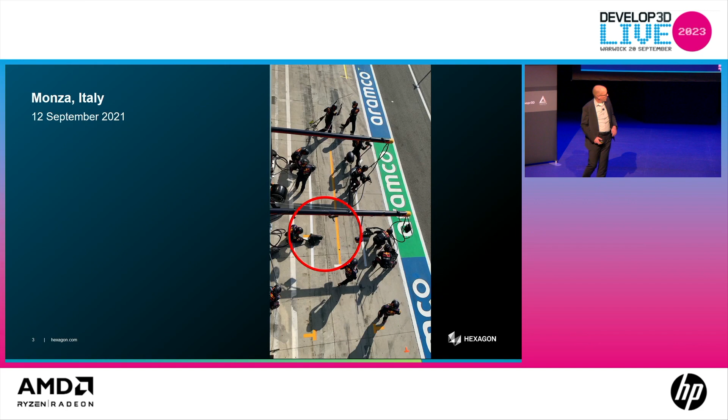So as I run this again, keep an eye on the guy on the front right wheel as the car comes in. This is at the peak of the rivalry between Max Verstappen and Lewis Hamilton, the star driver for Mercedes. Max is leading the race, which is going to put him in the lead for the championship for the year. So this is a team under a lot of pressure, and they mess it up.

So it turns out that the Red Bull pit stop is a terrible metaphor for team working.

These guys are not working as a team at all, at least not in any sense that's of any use to us. What they're doing instead is they're following a carefully designed process, one that's been meticulously refined over many years. They've rehearsed it over and over again to almost perfection. And with that process, they're able to achieve the world record—changing 4 wheels in less than 2 seconds.

But as you've seen in the video, the problem with something that's process-driven like this is that when something goes wrong, the whole thing falls apart. It took them 11 seconds instead of 2 seconds—5 times as long as it should have done to change that wheel, because as soon as something went wrong, they didn't know what the hell to do next.

Now, just to complete the story, those of you who watched Formula One will probably remember what happened next. Verstappen goes out onto the track. About 60 seconds later, Hamilton comes into the pit stop for his pit stop. His goes much more successful. He comes back out onto the track. There's just enough time for Verstappen to have done a full lap of the circuit. As Hamilton's coming out, Verstappen's pulling up alongside him. The two of them end up next to each other down the main straight at Monza.

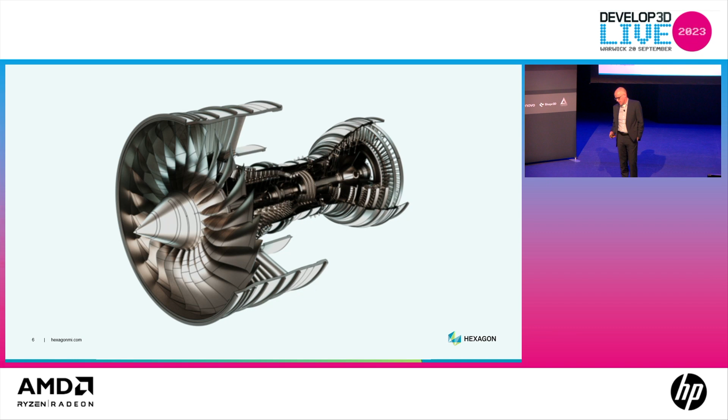Achieving that collaboration across the organization is a real challenge in this case. And that's anecdotal, but it corresponds exactly with the research that we did when we started developing Nexus.

This, by the way, speaks to the rise of the metrologist. So one of the areas that we operate in is, again, in metrology - offering equipment like this for doing quality inspections, measuring parts, and software like this.

What we've observed as a business over the years is the increasing importance of the metrologist. They used to be the quality inspectors at the end of the process that just said yes or no as to whether a product was going to go out the door.

Then we started talking about digital thread and Industry 4.0 and all that stuff, and the data that the metrologist was generating suddenly became really important. This is where you make the bridge between the digital thread and what's actually going on in the world. And then you get to a story like the aircraft engine manufacturer, and now the metrologist is really in the forefront of innovation.

So they need to be working really closely with the designers to ensure that as we're pushing the boundaries on these product designs, we're ensuring that they continue to be manufacturable.

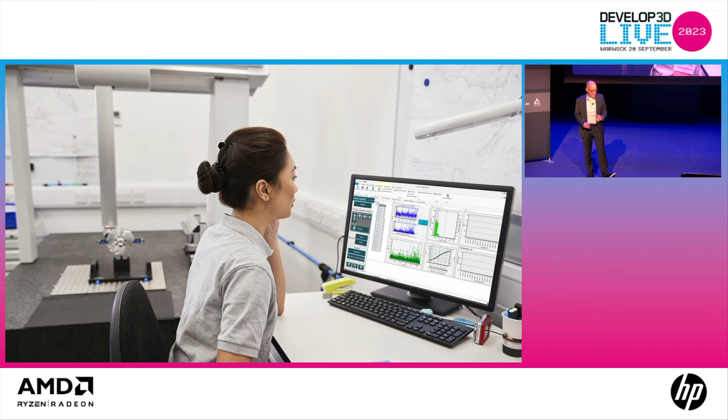It's anecdotes like this and research like this that led us to develop Nexus. Nexus is deliberately intended to be a cloud-based, data-centric platform that's different to all of the others. Up here in the top right-hand corner of my diagram, I've grouped together all of what I've called the classic enterprise systems, including all of the PLM systems.

We've heard from Aras today, we've heard from Siemens talk a little bit about Teamcenter in their presentation and so on. Not only the PLM systems, you might put your manufacturing execution systems up here, your MES systems. You might put your PDM systems up here.

We've got a few as well. We have a simulation data management SPDM system called SimManager that would sit up here. We have a QMS system, a quality management system called ETQ Reliance that would also sit up here. And they're all what I would call systems of record.

So they all exist. One of the core functions they all have in common is that they provide centralized, disciplined data management. So an engineer doing a task, whatever it might be, checks data out of the enterprise system, does their work in it, solves a problem, checks the data back in again. The enterprise system is maintaining a history of everything that's happened, of who changed what. A really essential function. I'm not trying to suggest there's anything wrong with that.

We're not trying to challenge that at all, but this is the embodiment of the centralized manufacturing organization today. This is about centralized control of an organization, and it's all about the process, about everything that makes things work. It's about the reason why Red Bull are able to change 4 wheels in 2 seconds, but it's also everything that's wrong with that as well. It's about the kind of constraint and the centralized command and control.

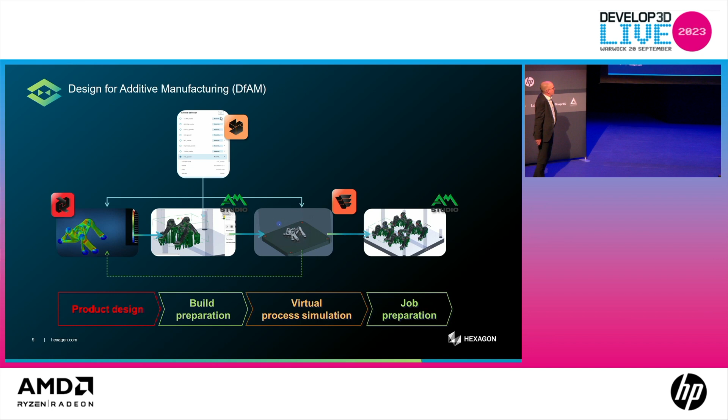What you'll see in this video are a handful of different products. It so happens they're all Hexagon products. Nexus is an open platform. We're not only interested in integrating Hexagon products. Sadly, we don't have any customers that only buy products from Hexagon, so the platform has to be open, and we're passionate about it being open.

What we've done in this Nexus solution is connected together a handful of different products that engineers working through the design phase for additive manufacturing might use to work together. The first one you just saw was a product called Apex Generative Design. It automatically generates the geometry for this part, the optimum geometry for supporting the loads. As it happens, this part is an engine bracket for a Formula One engine. That's just a coincidence, but that's what it is.

So the first product was the product design. The second one you just saw was the build prep, a product called AM Studio.

It does the build prep, so it puts in all the support structures. If you're 3D printing in metal using a powder bed fusion process, you need to put support structures in place because while the part is being built, it'll collapse unless the support structures are in place.

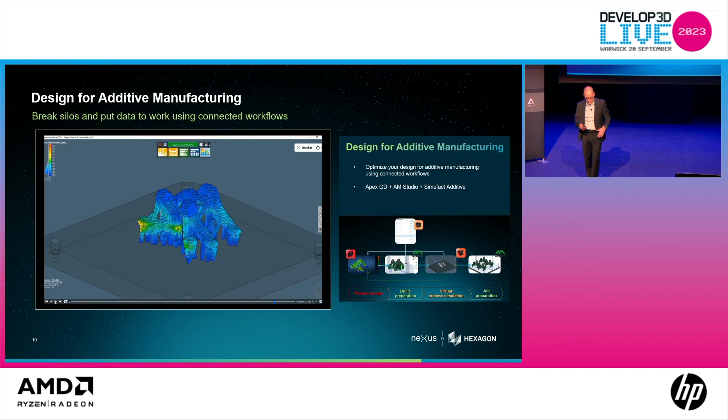Then the third product, Simufact Additive, simulates the manufacturing process. Again, if you're going to 3D print in metal, it's expensive. There's a lot of thermal stuff going on, a lot of stresses that appear in the part while you're printing it, and so there's a lot that needs simulating in advance. So you simulate it before you manufacture it.

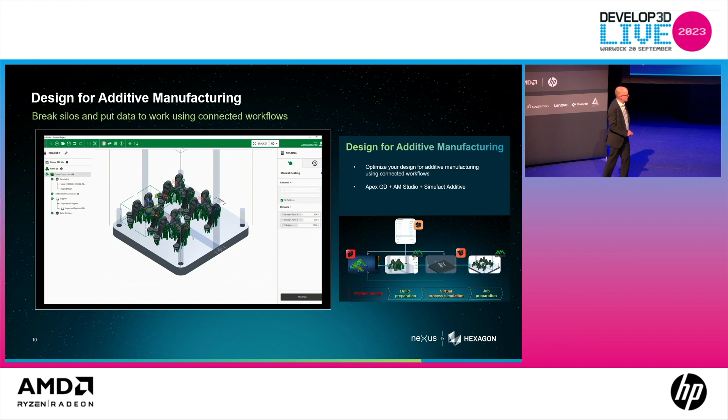And then finally you go back to AM Studio, which just does the job preparation, kind of slicing the part to generate the commands that are going to drive the 3D printer. There's also a materials database feeding data into this whole process.

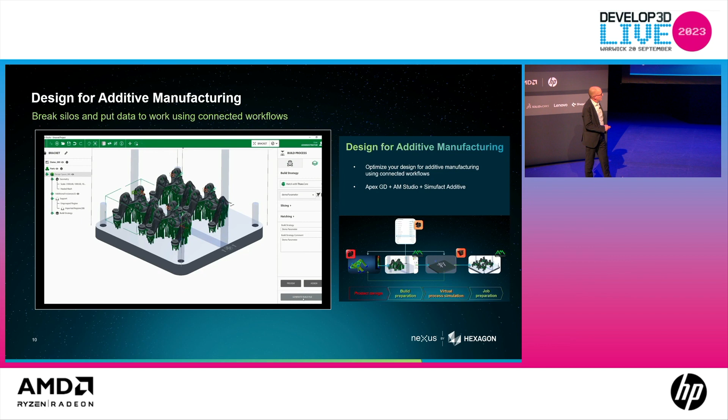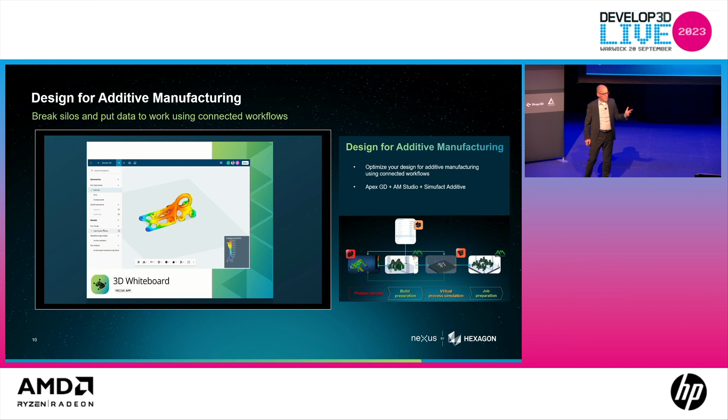So at the heart here there's three different products: the product design that the designer is using, the build prep used by a production engineer, and then a simulation product used by a CAE engineer or a manufacturing simulation engineer or whatever it might be. Three different products. Some of these products have existed for decades, by the way.

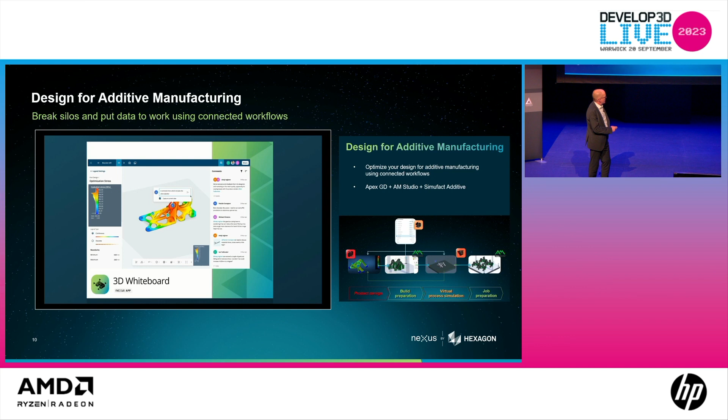Some of them are brand new. This materials thing is brand new, some of them have existed for decades. The engineers using these are very familiar with them. There'll be a lot of resistance to move away from the existing products they're using. This thing's up in the cloud, some of these are desktop-based products. A mix of technologies, a mix of engineers, a mix of disciplines.

Now, what Nexus does is it connects all of these products together in real time, and so data is streaming in real time from one product to the next. So it initially solves the easy problem, which is how do you get data from one application to the next. But it's doing more than that, because it's streaming the data in real time, any changes that one engineer makes can be immediately seen, immediately reflected in the applications that the other engineers are using.

And so this stimulates an environment where the three engineers, the three different disciplines, can work together to solve a problem. So let's say that the third engineer simulating the 3D print discovers that there's a problem, that for some reason this part isn't going to print correctly. The question has to be asked: is that a problem with the design, or is it a problem with the production engineering, the build prep of the part?

With these three applications connected together and streaming data in real time, these three engineers can work together in real time to solve that problem. They get on a Teams call together. The designer can tweak the design, you can tweak the build prep, and the simulation can be running simultaneously.

And so hopefully by working together in that way, they can find a solution to that problem much more quickly than the traditional method, which would be that the simulation engineer writes a report, sends it to the first guy, and they kind of go around the loop again. You keep iterating until the problem is solved.

And so it's just an example, in a very specific space in the additive manufacturing space, but hopefully it illustrates the idea, which is: we want engineers sitting in front of the applications that they're familiar with, looking at the world through the window that they've been using for the last decades, or whatever tools they want to choose to use, but put in place a technology that allows them to work in real time by streaming data between their environment and the environments of other engineers. And so this additive manufacturing process is focused on the design phase at the moment.

I mean, you can be sure that we're going to be extending that into the quality inspection space. There's opportunities to take it into CT analysis as well, and also post-machining of 3D printed parts, and all of that's on our roadmap for this particular solution. We're building solutions across many other manufacturing processes for multiple different industries, and we're very interested to engage with customers to build specific solutions to specific problems that they have.

So I talked specifically about design working together with manufacturing, and the example kind of reflected that as well. Nexus is built to solve that problem. Nexus is also there to address any other collaboration issues and challenges in organizations. Like I say, it's complementary to whatever data systems are there already.